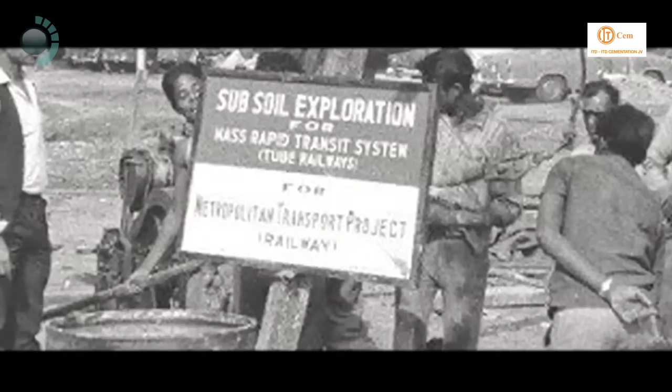The technologies that were adopted for the first time in India for the north-south line were new to India at that point of time. Being the country's first and a completely indigenous process, the construction of the Kolkata Metro was more of a trial and error affair, and as a result, it took nearly 23 years to completely construct a 17-kilometer underground metro. But Kolkata, a city in need of renewal, is in dire need to provide its citizens the best amenities available in the country.

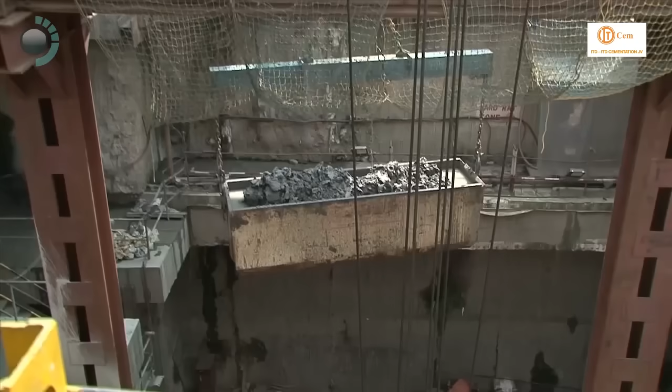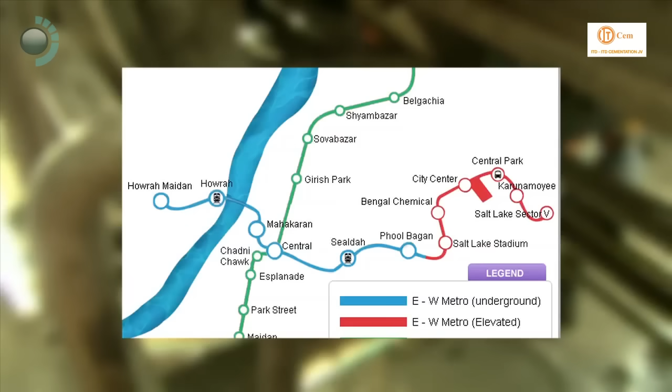Realizing the magnitude of this problem, the government was keen to put into place modern infrastructure. Working towards achieving the goal, one of the initiatives taken is the East-West Metro Corridor, connecting Salt Lake City to Howrah Maidan, bisecting the existing North-South line at Central Station, which would be the interchange station, thereby connecting the two busiest railway stations in the world, Sealdah and Howrah.

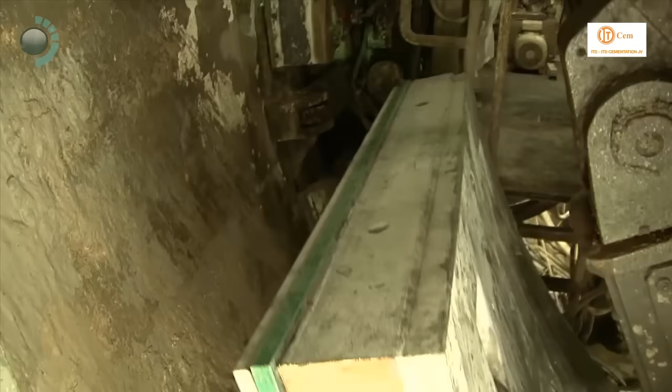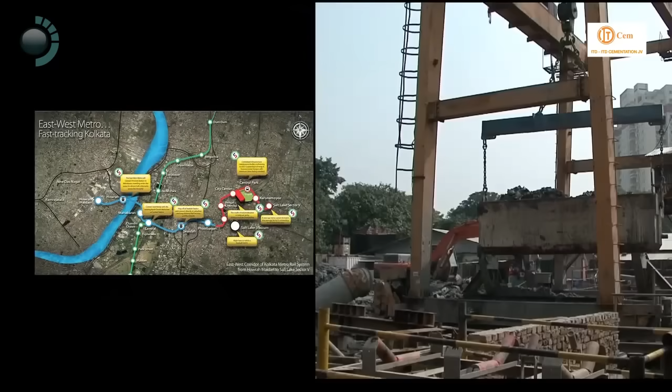A complex challenge taken up for the first time in the country by Kolkata Metro Rail Corporation Limited. A journey whose end is in sight. A journey which will give Kolkata its second metro. A metro the residents would be proud of. The East-West Metro is a 14.67-kilometer track, of which 8.9 kilometers will be underground and 5.77 kilometers will be elevated. Expected to serve 480,000 commuters every day.

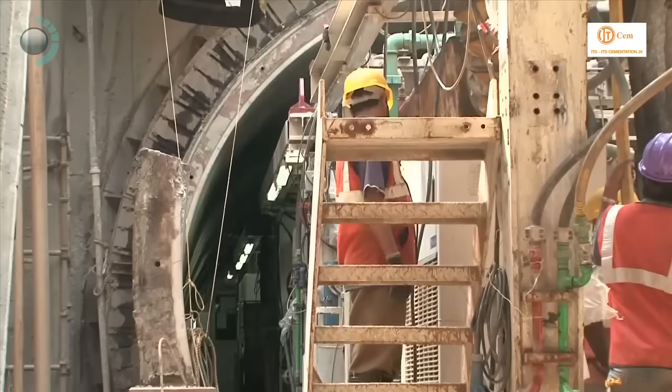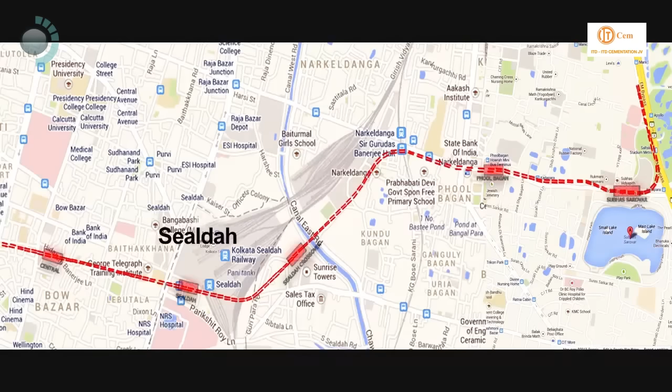East-West Corridor, when complete, will have 6-car trains each with a capacity of 1,626 passengers. With 6 stations underground and 6 elevated stations for the entire stretch, the design and build contract of the 5.263-kilometer underground twin tunneling with 13 cross passages from Central Station to Subhas Sarovar, including the 3 underground stations of Central, 195 meters, Sealdah, 217 meters, Phoolbagan, 227 meters, a crossover, 118 meters, and the ramp, 504 meters, connecting the underground tunnel to the elevated viaduct, worth Rs 9,086.31 million, was awarded to the joint venture ITD Cementation JV.

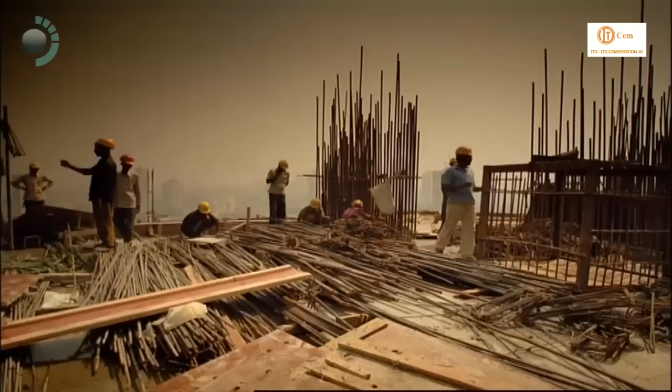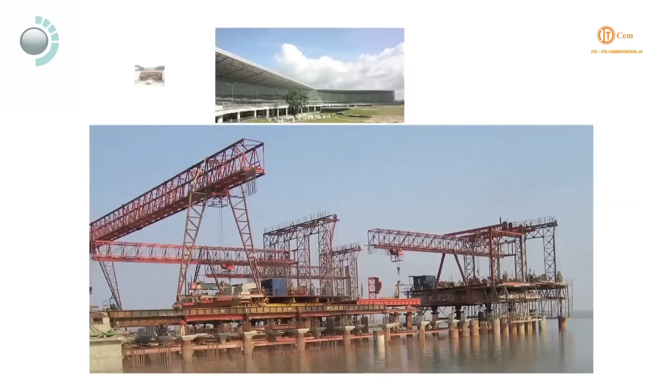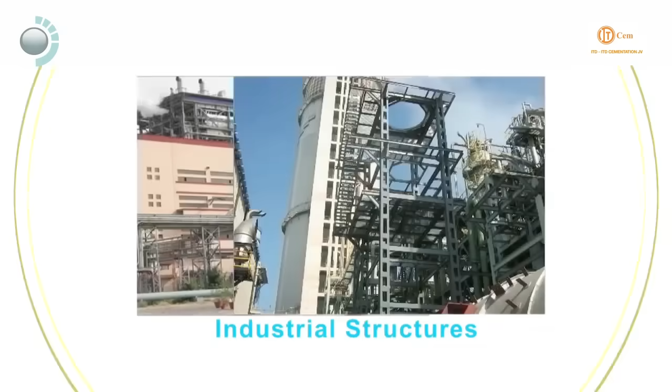ITD Cementation India Limited has been a constant partner in the growth story of India over the last 8 decades, mastering the 4 E's of engineering. The infrastructure built by this company is efficient, effective, economic and environment friendly. ITD Cementation India Limited has delivered its commitment towards growth in 8 different sectors, namely maritime structures, mass rapid transit systems, hydropower, tunnels, dams and irrigation, industrial structures, highways, bridges and flyovers, foundation and specialist engineering, tube heading and box pushing.

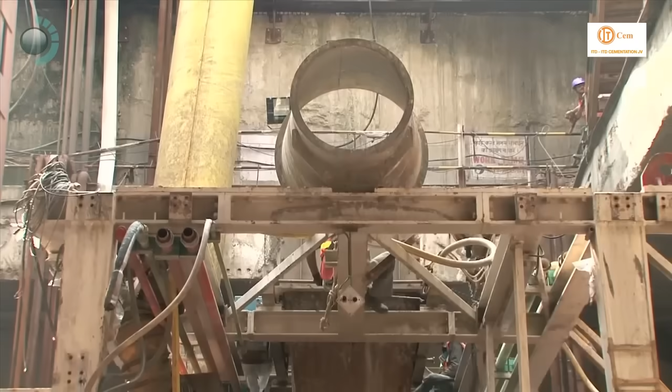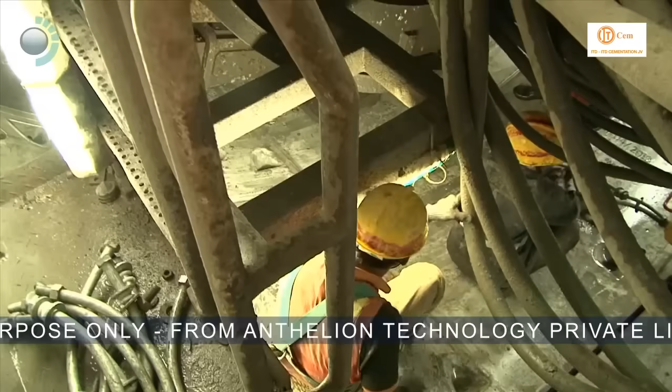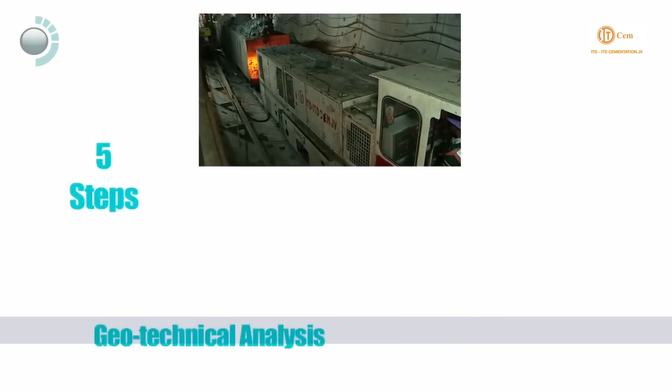The ITD Cementation joint venture contributed its knowledge and skill from the beginning of the Delhi Metro project and had been a constant contributor. The immense experience and expertise is the greatest value brought to the table by the company in the Kolkata Metro East-West Corridor in March 2010. The entire project is executed in 5 steps: geotechnical analysis, designing, mobilization, implementation and restoration.

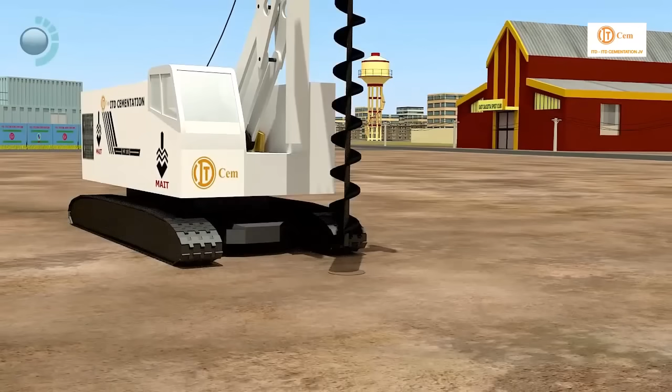A systematic geotechnical analysis is carried out. First, the locations of boreholes are laid. Based on the location, pits are excavated to probe for underground obstructions or utilities. Then the holes are bored with a diameter of 150 mm and up to a depth of 30 meters as per the specifications laid in IS 1892. Standard penetration tests are conducted to calculate the load-bearing capacity of the soil at site. The groundwater table is analyzed.

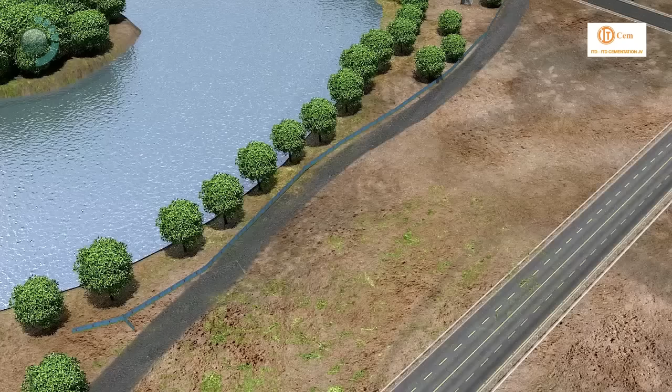Based on reports and analysis, the design for the entire project, with a design life of 120 years, is completed and the construction methodology is defined. The next step is to set up the sites of operation. Once the sites are acquired, the obstructions and utilities are bypassed temporarily for site operations to proceed without hindrance. The traffic and pedestrian movements are bypassed. The site is mobilized for operation and all required logistics are put in place.

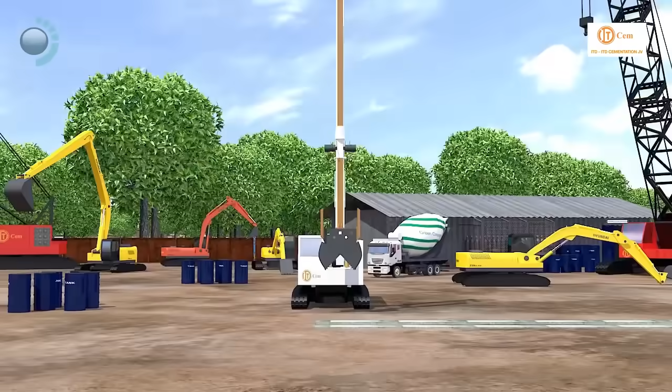To commence the first tunneling drive from Subhas Sarovar site, the cut and cover methodology is adopted. First, a guide wall is constructed to define the exact layout of the diaphragm wall, commonly known as D-wall. Excavation for each D-wall panel is done using a hydraulic rig to a depth which depends on design requirements. During the excavation in grab operation, while the excavated soil is progressively removed from the trench by grab and loaded into the disposal area, bentonite slurry is continuously supplied to maintain slurry level for trench stability. The stop ends are lowered.

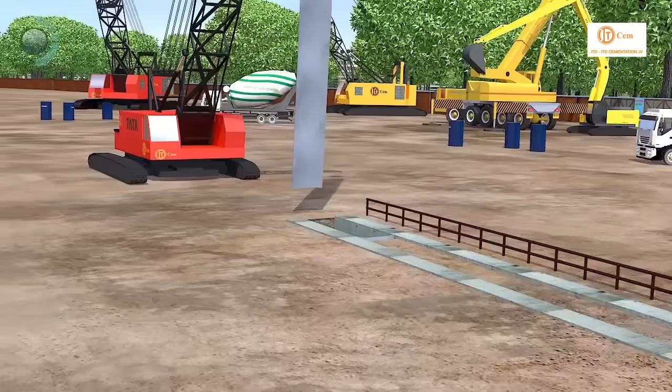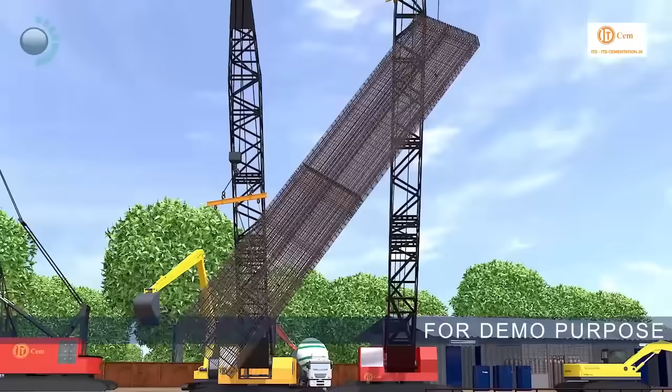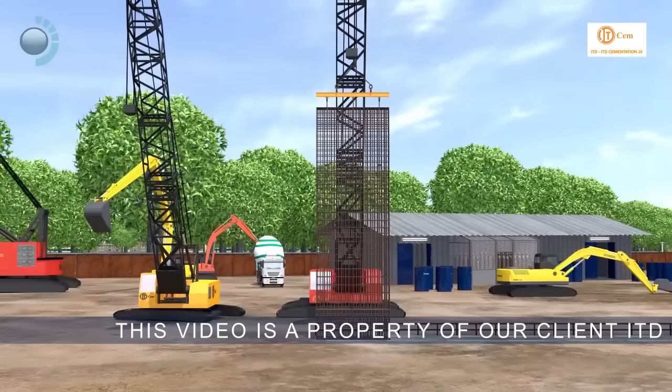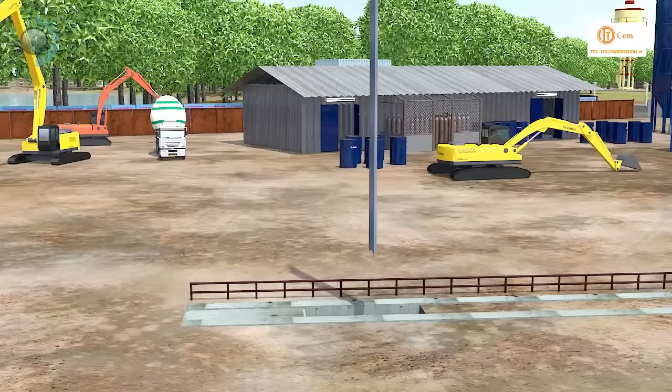The reinforcement cage fabricated on the ground is lowered using cranes, maintaining the vertical alignment. The couplers are fitted to be left open to join with slab rebars at a later stage. Concrete is poured through tremie pipes. The process is repeated in panel sets to create an interlocking D-wall along the guide wall alignment.

Excavations for slabs are done within the D-wall zone. On reaching a certain depth, the first slab, called the roof slab, is constructed with temporary openings for access. The rebars of the slab are coupled to the couplers of the D-wall, left open previously.

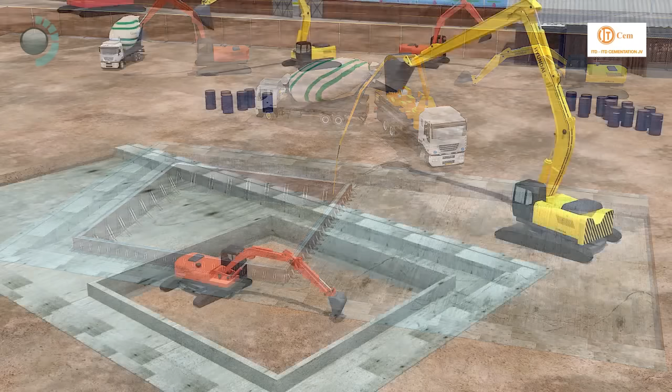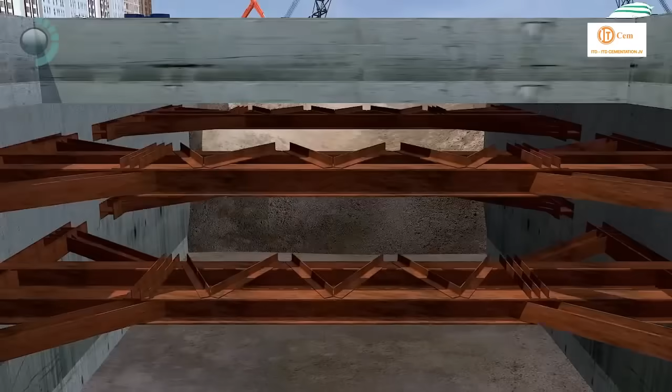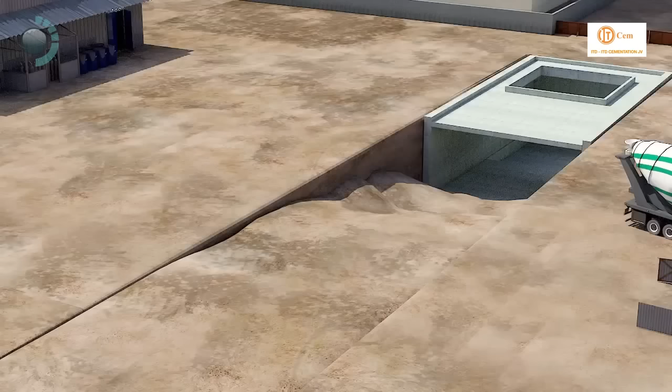Small size excavators are used for excavation below the roof slab. As more depth is obtained, temporary structural supports are provided to counter the soil load on D-wall. The base slab is constructed similarly as per the requirement of the site. Excavation and construction of the ramp side is completed.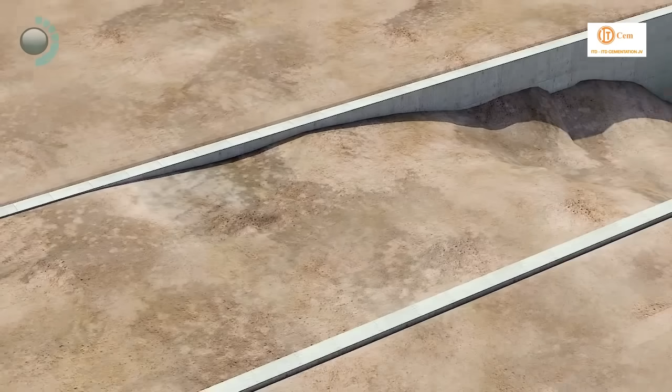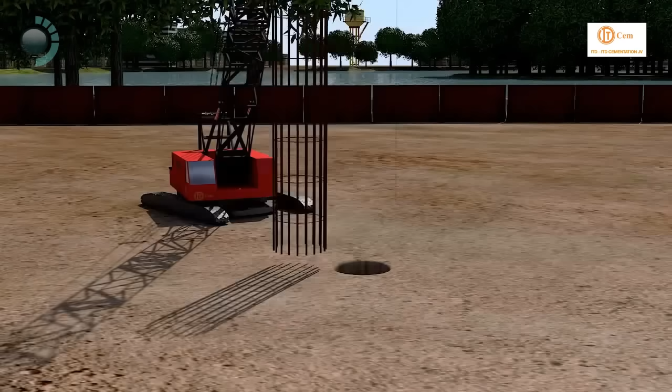To create the elevated viaduct, piles are constructed by boring holes, placing the rebar cage and pouring concrete. Pile cap is created and then piers are constructed over the pile cap. Pier constructions of different heights are done to extend the ramp above the ground to the desired height.

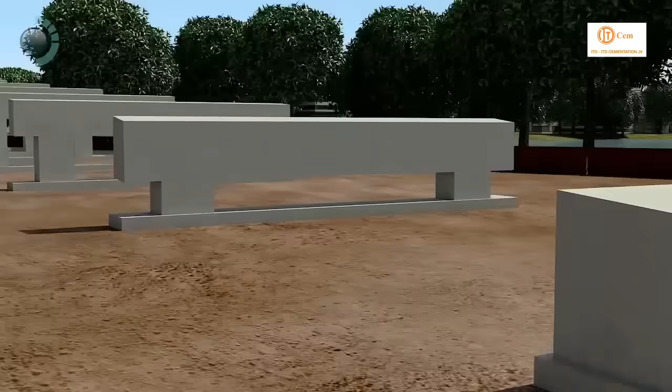The ramp is connected to the elevated viaduct constructed by other contractors. Precast parapet walls and railings are laid to complete the construction process for the elevated portion. Shear connectors are left open as per requirement.

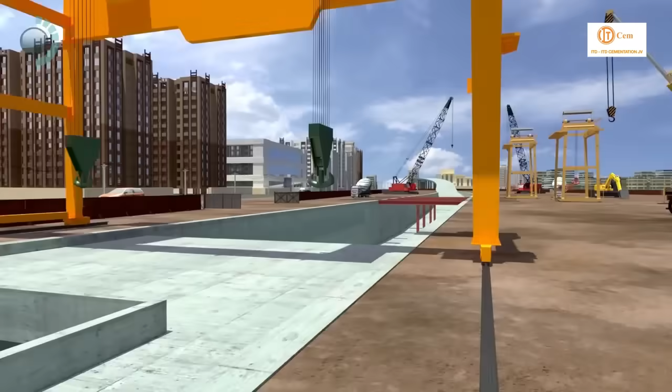The tunneling operation begins with the setting up of the state-of-the-art high-precision tunnel boring machine, commonly known as TBM. Based on the geotechnical report and existing soil conditions, the closed-type earth pressure balance shield TBMs manufactured by Herrenknecht, one of the leading brands in TBM manufacture, worth Rs 211.5 million each, are mobilized to the site. The 100-ton gantry crane is set up. A total area of 14,000 square meters is used to set up the backup logistics.

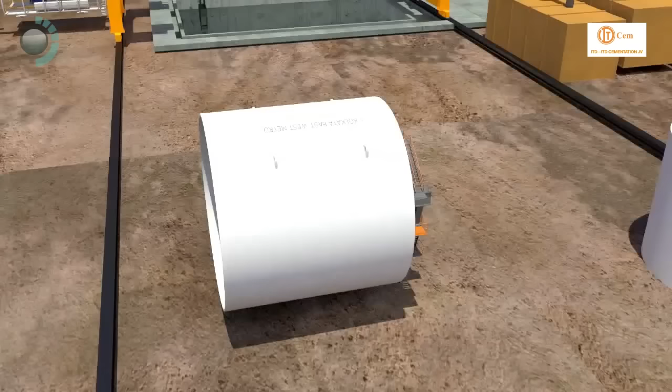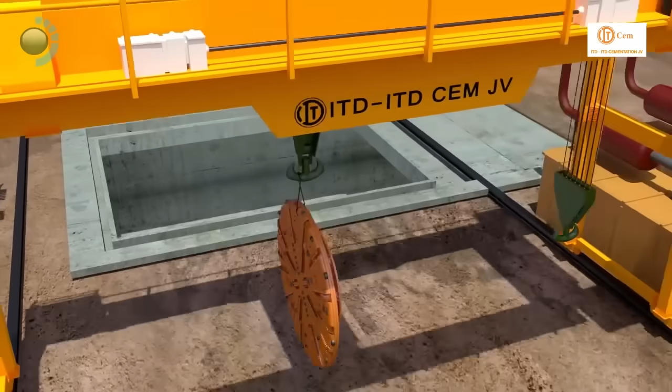The front portion of the TBM with front shield, middle shield and cutter head is lowered on the steel cradle using the gantry. TBM backup units like erector, screw conveyor and tail skin are lowered and commissioned. Once ready, the TBM is launched.

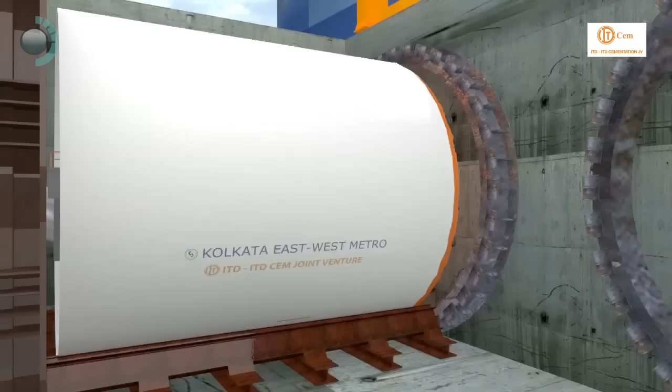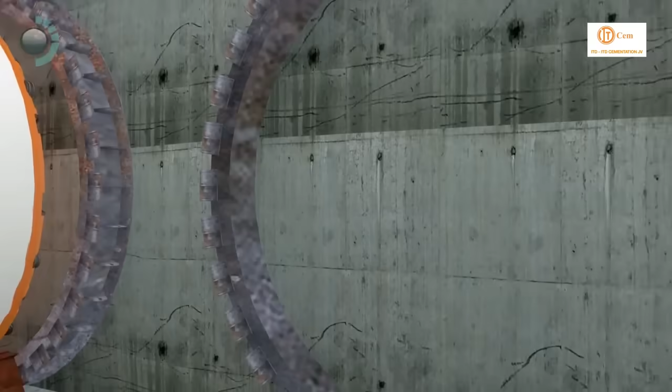The soft eye of the D-wall panel, which faces the cutter head of TBM, is made of glass fiber reinforced polymer known as GFRP. This provides strength but can be cut easily. With its rotating cutting wheel, the tunneling machine cuts through the panel and excavates the soil.

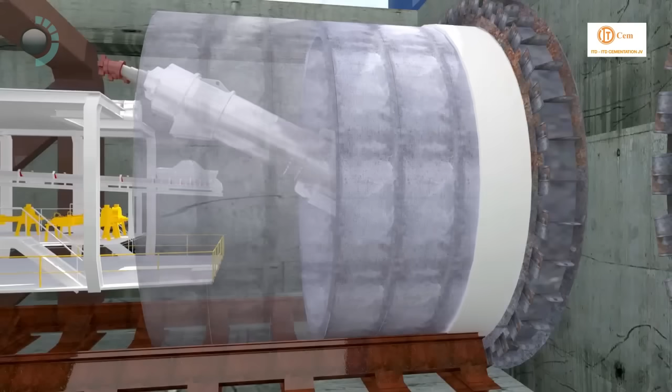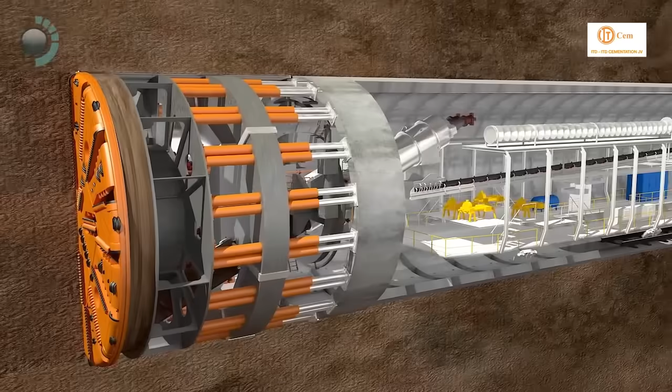The soil is conditioned with water, bentonite, stabilizer or foam using the injection systems located in the backup. The soil is then retained in a mixing chamber to maintain the earth and water pressure balance. While the hydraulic cylinders press the machine forward continuously, the sensors maintain and map the earth pressure balance continuously as excavation proceeds. Via a screw conveyor, the soil is then moved to the belt conveyor system in the rear of the shield. The screw conveyor's rotation speed is matched to the advance speed.

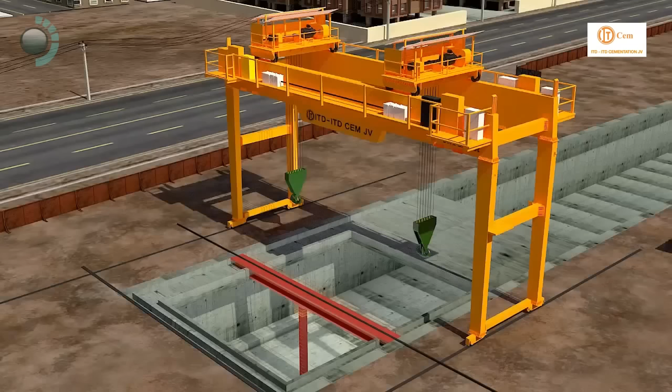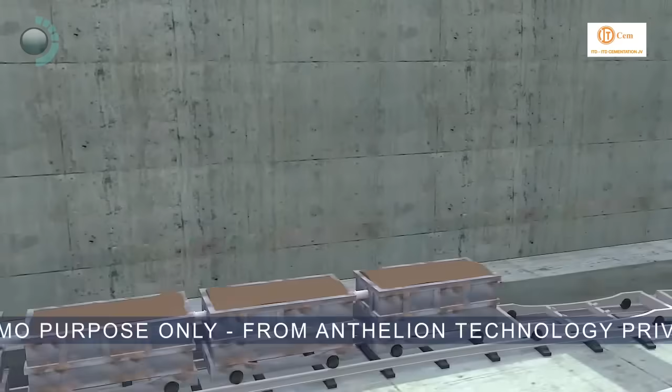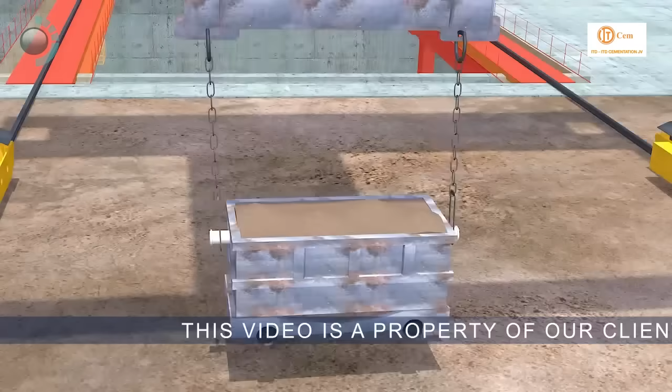As the TBM and main drive proceeds, the 100-ton gantry crane is replaced by two 35-ton gantry cranes, and the rail lines are laid for the movement of mud trolley cars and segment transportation. Soil excavated is moved out in trolley cars, which are pulled out by the 35-ton gantry cranes. Concrete lining segments are cast in the casting yard and brought to the tunneling site. These cranes are also used to lower the concrete lining segments in the shaft.

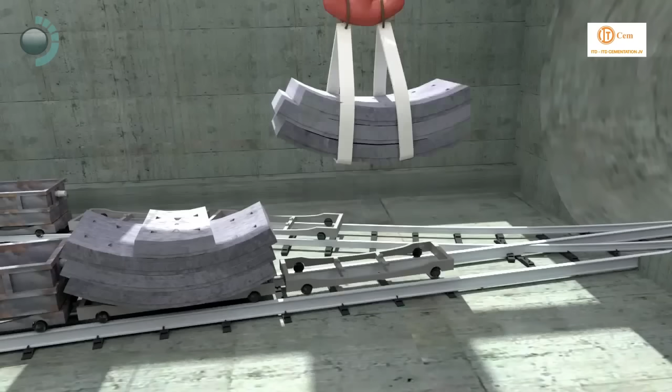At main drive, the tunneling speed is 12 to 15 meters per day. The reinforced concrete segments, known as lining segments, are installed using the erectors.

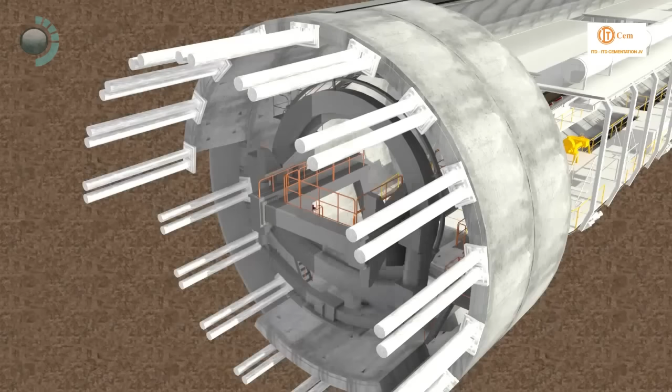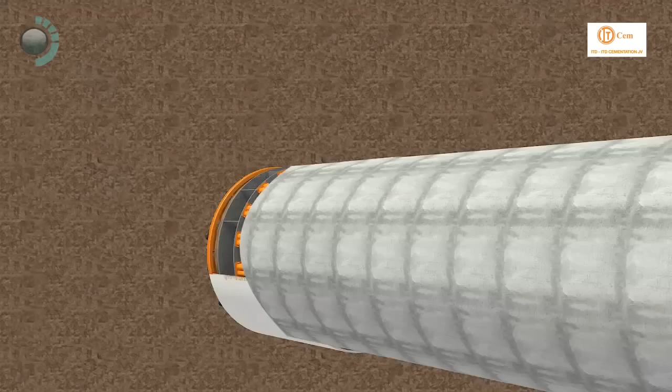When the ring building has been completed, the machine can push itself against the new tunnel ring and draw further into the soil. The 80-meter-long backup accommodates all the logistic facilities necessary for the operation of the overall system. While the tunneling proceeds, continuous monitoring using advanced monitoring instruments is done on surface infrastructure, including residential and commercial buildings, to check the surface settlement of soil.

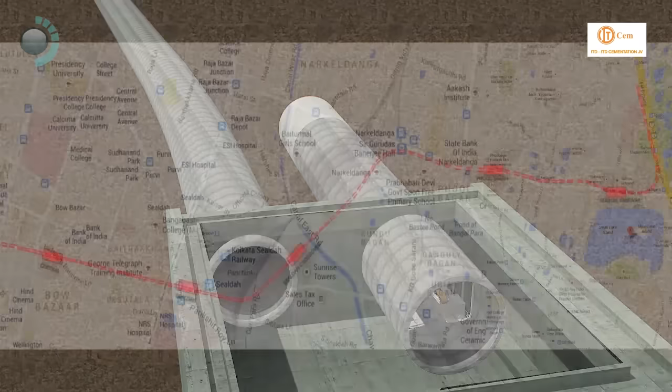The second tunnel begins with approximately 1 month of gap. Both the tunnel boring proceeds together in synchronization. Starting at the Subhas Sarovar end, the tunnel breakthroughs on the other end at the Phoolbagan station.

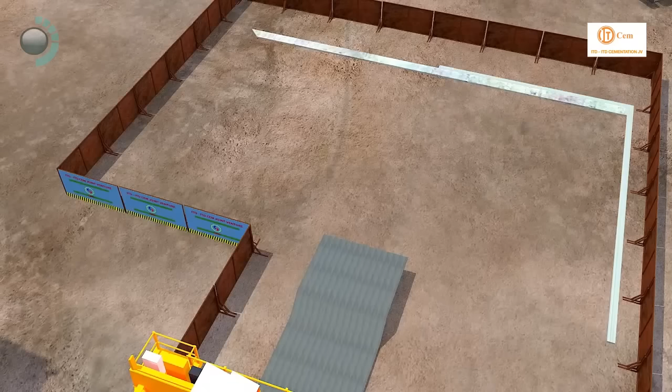The site is first set up and D-wall is constructed towards the breakthrough end. A temporary D-wall is also created to create the zone for TBM breakthrough. The excavation completed, the slabs are constructed and the receiving shaft is completed 1 month in advance prior to TBM arrival. As the TBMs break through, they are removed through the receiving shaft using the 100-ton gantry crane.

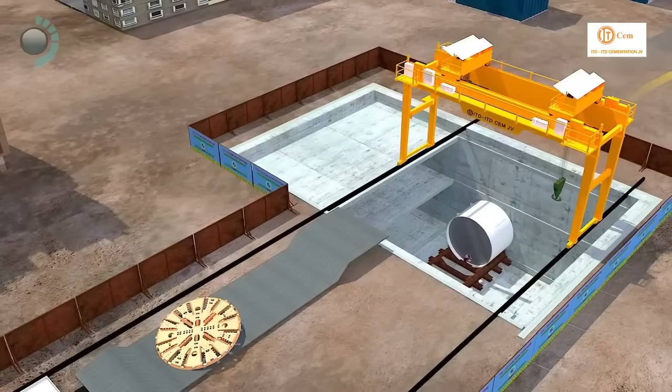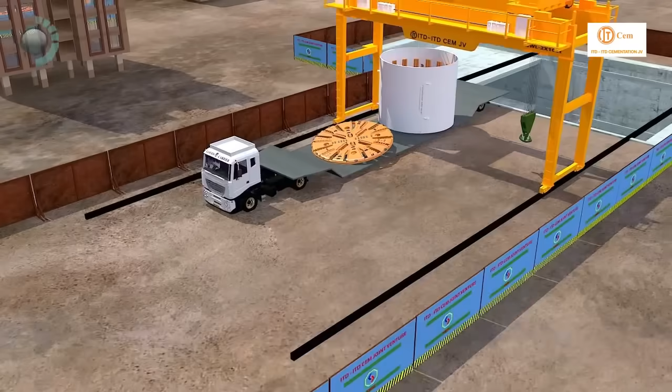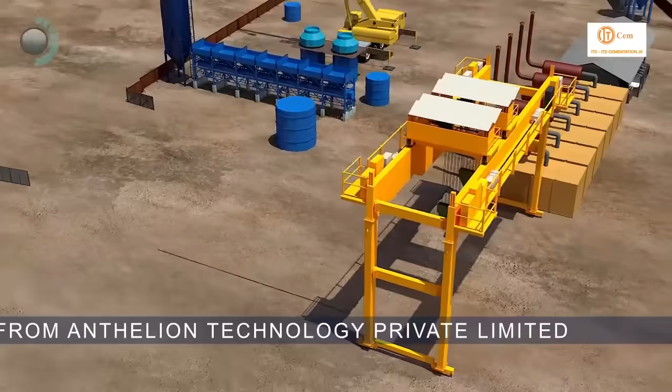They are then sent to the Sealdah crossover for the initiation of the next tunnel as per scheme. The backup logistics from Subhas Sarovar is demobilized and set up at Sealdah crossover. At the crossover, the site is prepared, excavation completed and slabs are created.

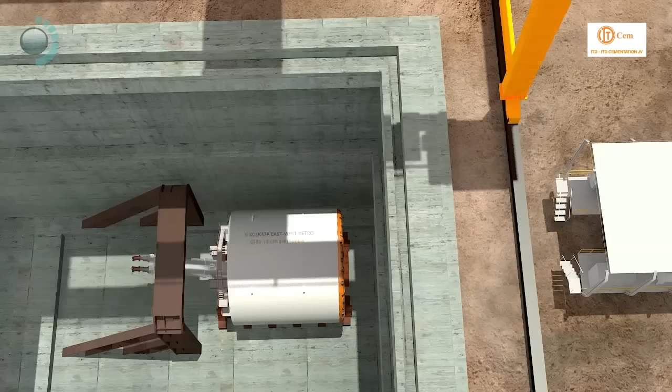The gantry crane is erected. The initial drive is launched with the backup logistics set up on the surface. While tunneling in initial driving mode, power will be connected from the power units situated outside the tunnel to the shield machine via hoses and cables. The soil is excavated and removed via bucket and crane and progresses at the speed of 3 to 4.5 meters per day.

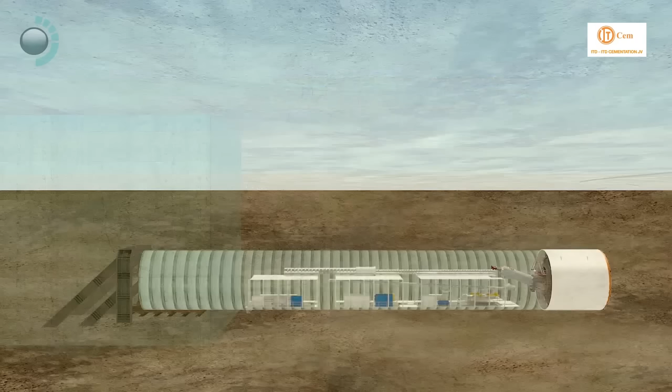In this case, the cutter head and front shield extends for 80 meters at first stage, creating space for the TBM backup to be lowered. Once the TBM backup logistics are commissioned, the main drive is launched, cutting through the entire tunnel to the Phoolbagan breakthrough. The conversion from initial to main drive takes 3 weeks.

Once the tunnel is complete, all infrastructure is removed and grouting is completed to seal all leakage and seepage points. The tunneling process is repeated now from the crossover to the Sealdah station and then from Sealdah station to the central.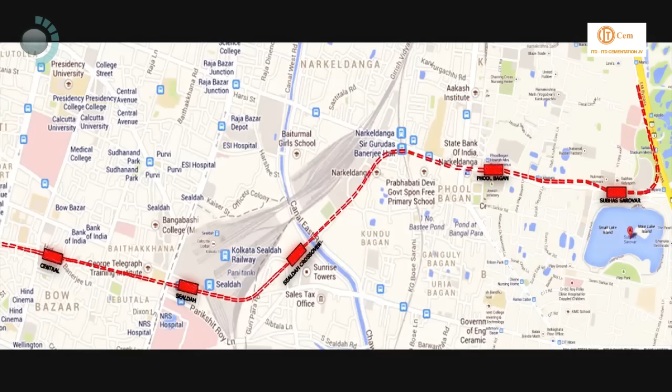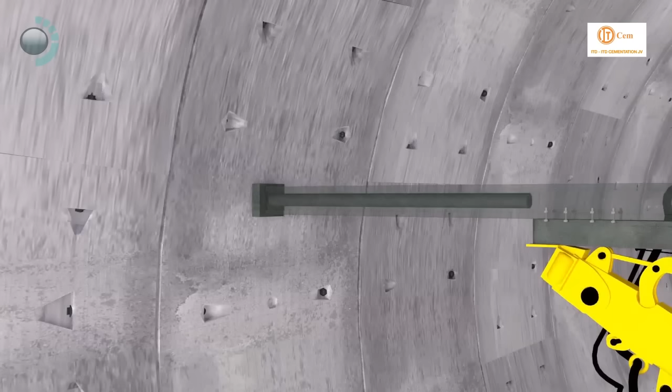13 cross passages are constructed by new Austrian tunneling method technique at intervals of 250 meters as per design. For this, the locations are first identified. Then drilling and grouting is done with self-drilling anchor machine for roof support to prevent collapse of soil while excavation.

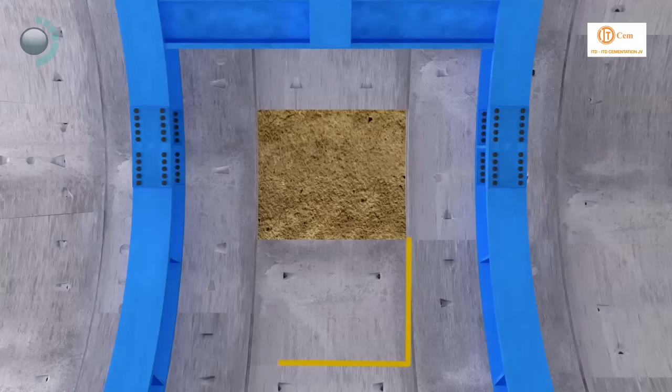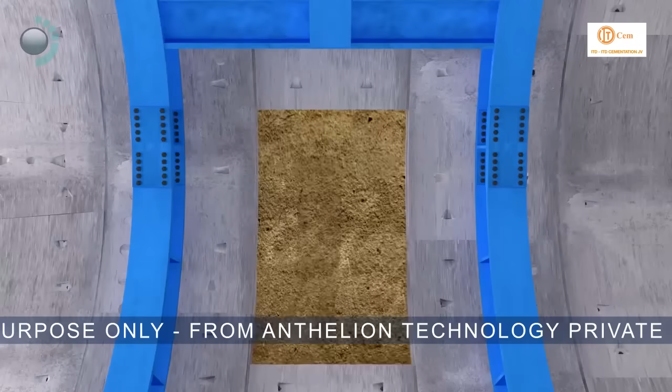Finally, the inner RCC lining is constructed to complete the cross passage. All supports are then removed. On completion of all the tunneling activity, track bed concreting is done using PCC and shear connectors are left open for laying of tracks. Walkways are installed.

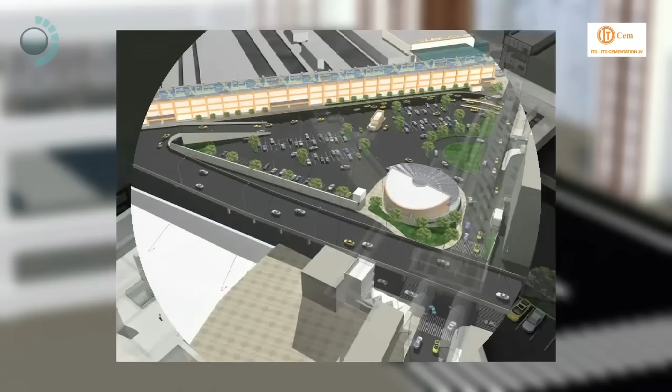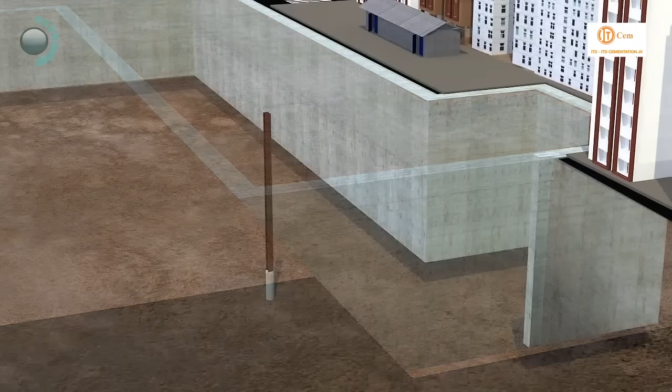For the stations which are being constructed in parallel, a top-down construction methodology is adopted. First, the site is set up, utilities and obstructions are identified and relocated. Deep foundation structures like D-wall, piling with plunge columns or king posts are constructed which act as earth retaining and load-bearing structures during the construction stage. Depth of D-wall may vary from 25 meters to 34 meters with a width of 1 meter. While the piling is 1.2 meters in diameter, its depth varies from 40 to 48 meters from ground level.

Excavation is completed and slabs, roof, concourse and base slab are constructed with permanent and temporary openings as per requirements. This creates the underground box structure for the station. The platform slab is constructed. Then follows the secondary structures, the permanent columns, staircases, lift wall, office rooms, architectural, E&M and plumbing works completed. The interfacing agencies are provided access to complete the tasks in parallel.

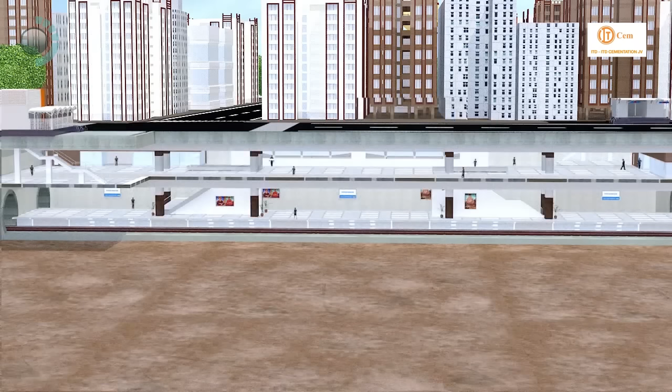Finally, all temporary openings are closed and final reinstatements are completed. All utilities are restored before the handover. The completion of 5.263 km tunnel with 3 underground stations, 1 crossover and ramp is high precision engineering on which depends the daily life and business of the entire city.

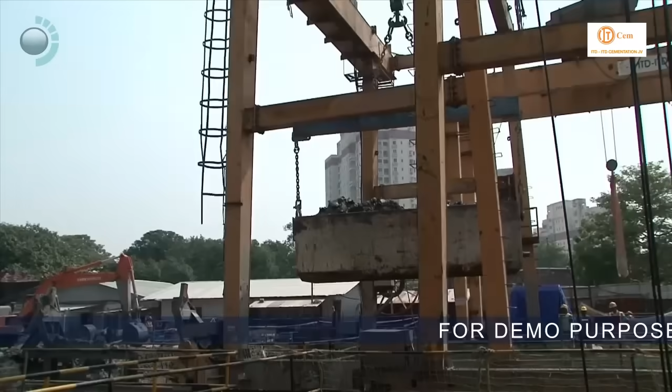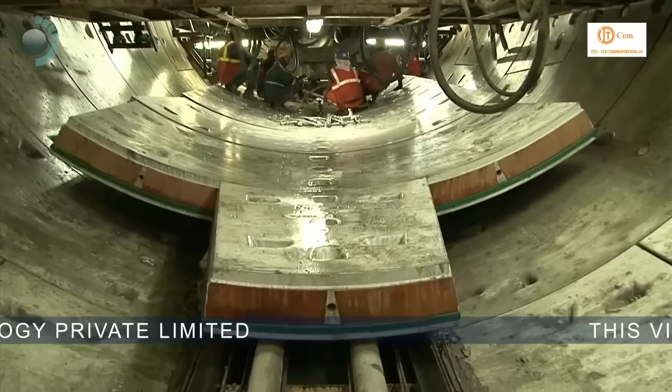Construction of such a project below densely populated residential areas and roads without any kind of vibrations or damage to sensitive infrastructure above demands years of expertise, technical skills with professionalism and high standards of safety and quality.